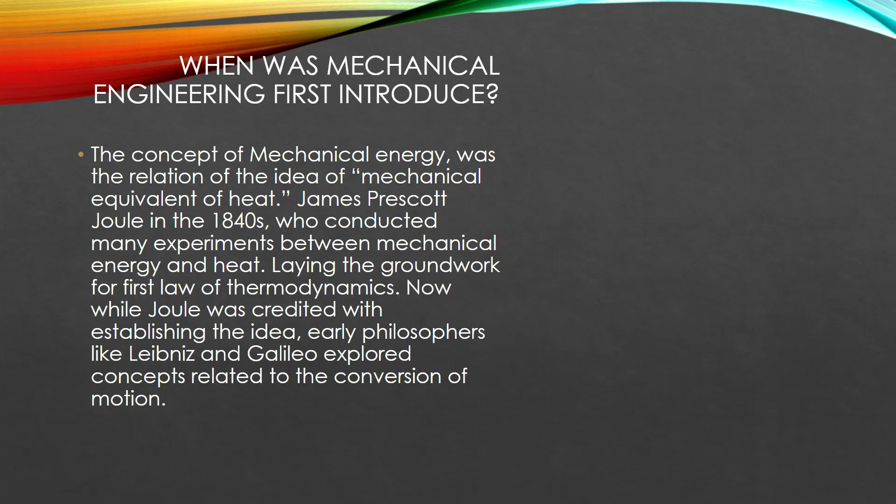So when was it first introduced? It's a little bit complicated, so let's get into it. The concept of mechanical energy was related to the idea of mechanical equivalent of heat. James Prescott Joule, in the 1840s, conducted many experiments between mechanical energy and heat, laying the groundwork for the first law of thermodynamics.

While Joule was credited with establishing the idea, early philosophers like Leibniz and Galileo explored concepts related to the conversion of energy and motion. I'm sorry if I butchered their names. This picture right here is basically James Prescott Joule.

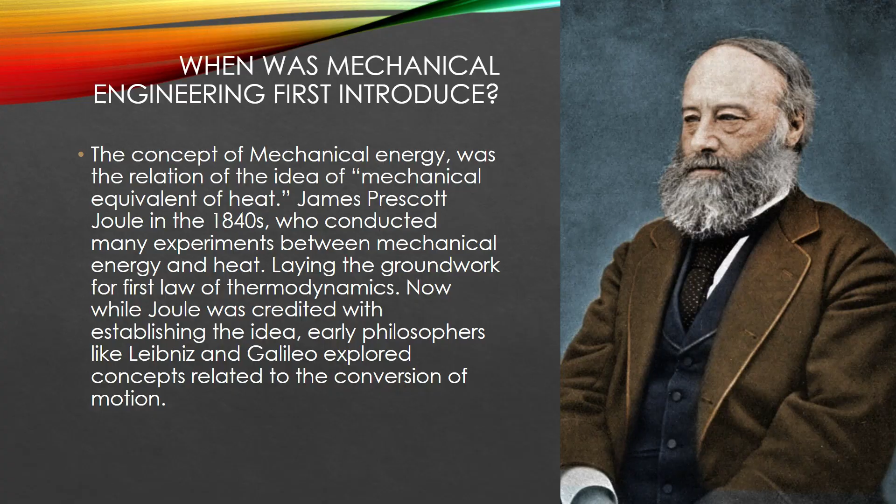Thermodynamics is the science of the relationship between heat, work, temperature, and energy. It also deals with the transfer of energy from one place to another and from one form to another. The key concept is that heat is a form of energy corresponding to a definite amount of mechanical work.

There are technically 4 laws if you include the zeroth law. But let's talk about the 3 main laws that you mainly need to learn and know.

The first law states energy cannot be created or destroyed, or in thermodynamics terms, heat cannot be created or destroyed. This has been one of the biggest sayings in the universe forever. The second law states that for a spontaneous process, the entropy of the universe increases. The third law states that a perfect crystal at 0 Kelvin has 0 entropy.

As you can see in the picture here, these are more examples of how the first, second, and third laws work, and the zeroth law as well. The entropy of a system approaches a constant as the temperature approaches absolute zero.

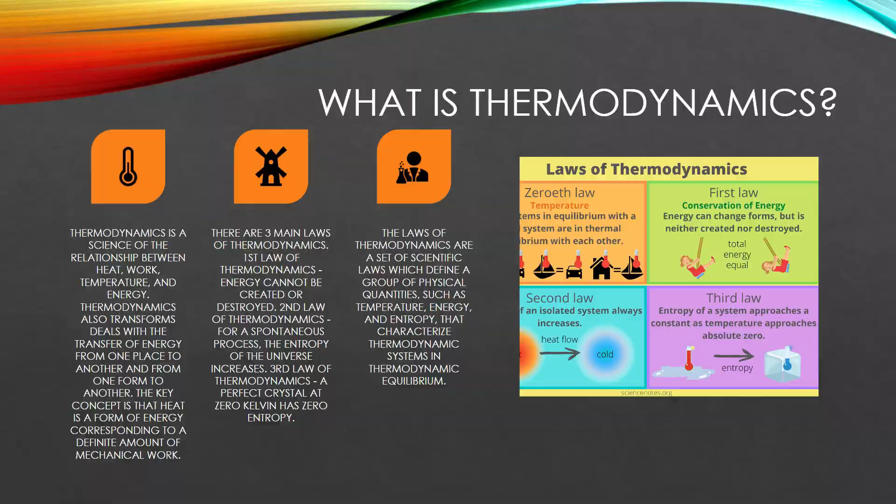In 1698, Savery had obtained a broad patent for his pump. Newcomen could not patent his engine, so he entered a partnership with Savery. This became the first recorded Newcomen engine, erected near Dudley Castle, Staffordshire, in 1712.

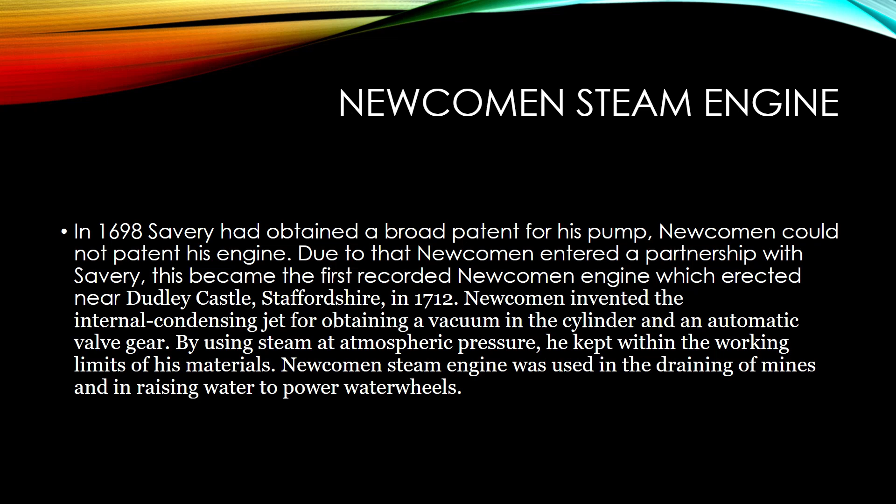Newcomen invented the internal condensing jet for obtaining a vacuum cylinder and an automatic valve gear. Using steam at atmospheric pressure, he kept it within the working limits of his materials. Newcomen's steam engine was used in draining mines and in raising water to power water wheels.

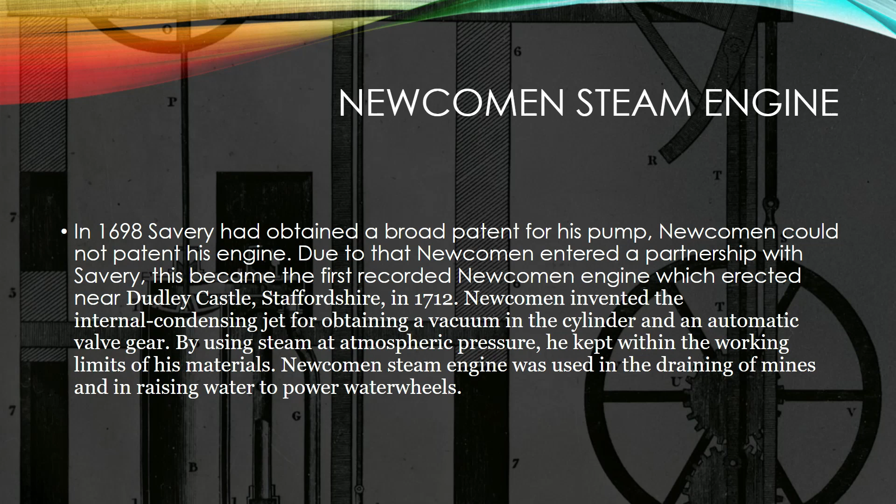This is the first design of the Newcomen steam engine. You see here, you're pulling up water, as you would usually have a bucket right there pulling up water, and so on. Now, the sewing machine.

This picture shows Howe invented the first practical sewing machine, but the first recorded design of the sewing machine was created by Thomas Saint in London in 1790. A sewing machine is a device that stitches fabric and other materials together with a thread.

A sewing machine uses a needle and thread to stitch fabric together in an up and down motion. Early sewing machines were powered manually by spinning a wheel, but modern sewing machines are powered by electricity. Back then, you had to actually generate electricity, but now it just runs by itself because of the advancements we've had in technology.

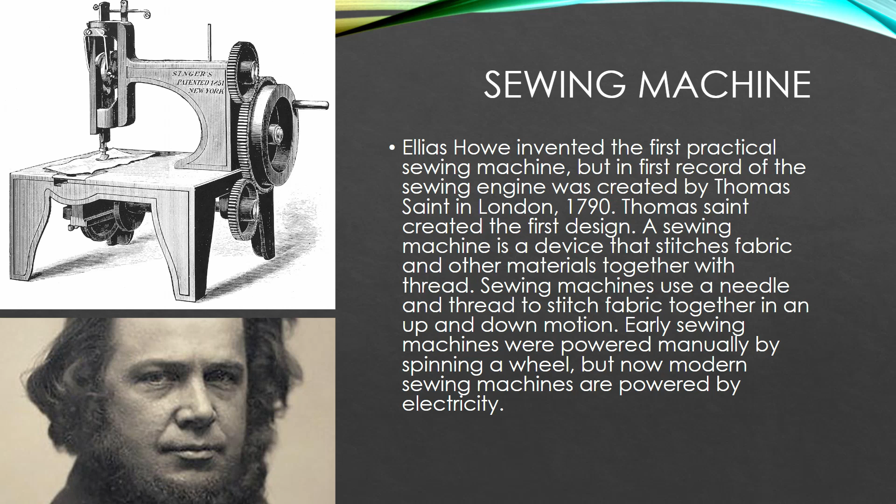Now let's move over to mechanical refrigeration, also known as air conditioning or refrigeration. It's a process that uses a heat exchange system to remove heat from a specific location. It's based on the first law of thermodynamics, which states that heat cannot be created or destroyed, only moved from one place to another.

Dr. John Gorrie expanded on this idea, but Oliver Evans, an American inventor, designed a blueprint for mechanical refrigeration. In 1834, the first practical mechanical refrigeration was built by Jacob Perkins. But Dr. John Gorrie took that blueprint and invention to a whole new level.

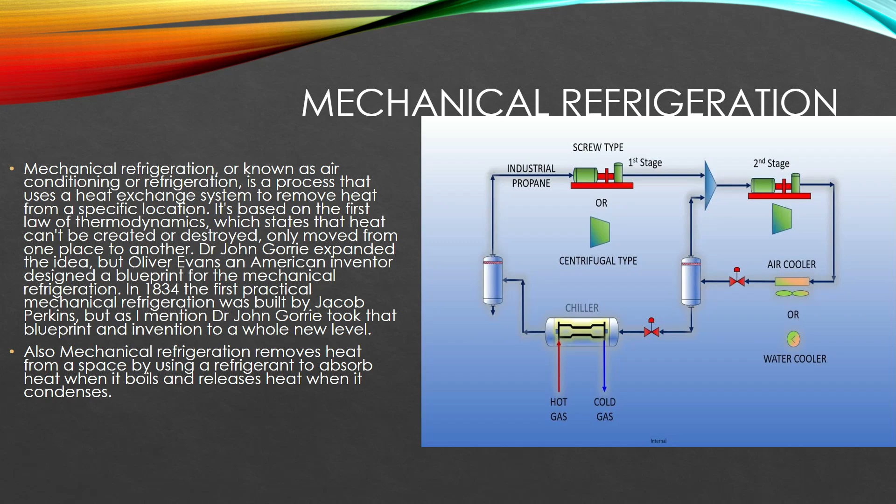Mechanical refrigeration removes heat from a space by using refrigerant to absorb heat when it boils and release heat when it condenses. This picture right here is the most simple version of how it works.

You don't really start somewhere specific, but let's say you start at the evaporator, then go to the compressor, over to the condenser, and on to the receiver to receive the high pressure liquid.

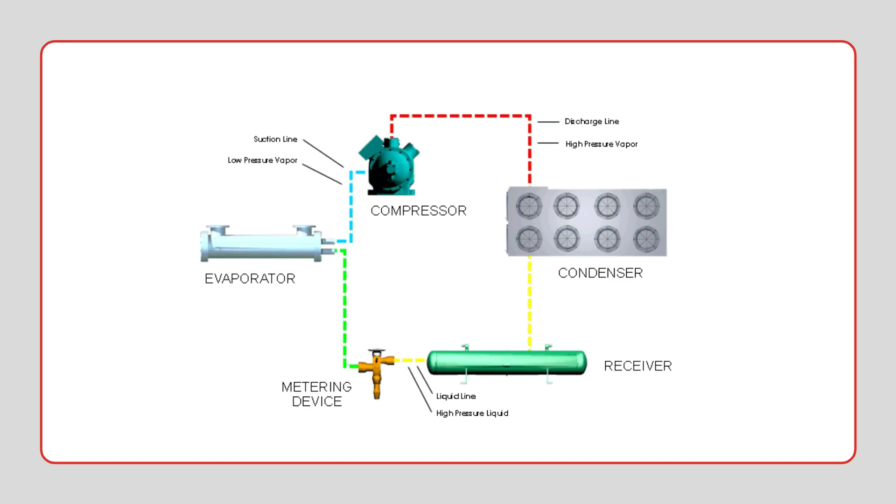The first fuel cell, also known as a gas battery. The fuel cell works like a battery, but it does not run down or need recharging, meaning it produces electricity and heat as long as fuel is supplied.

The fuel cell consists of a negative electrode and a positive electrode, and they are surrounded by an electrolyte.

Invented by Sir William Grove in 1838, it was introduced to the public by 1839. The concept involved reversing electrolysis, the process to generate electricity from hydrogen and oxygen.

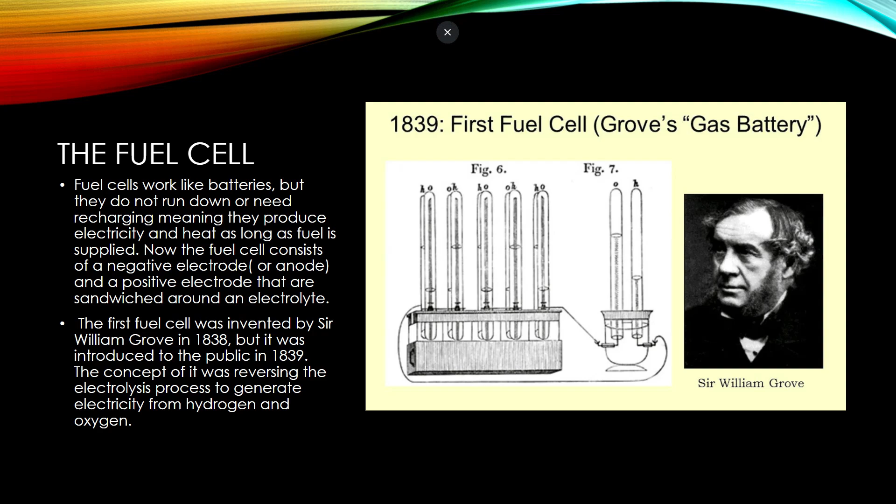Solar power could be one of the biggest things in the engineering world, and specifically in mechanical engineering.

Solar power, also known as solar energy, is the process of converting the sun's energy into electricity or heat. It's a renewable energy source that can be used for many purposes, including heat, electricity, and even light.

Solar power has been around since BC times, but there have been many contributions to explaining the idea of solar power. During the 7th century BC, people used solar power by reflecting the sun's rays onto shiny objects to start fires.

From the 1800s to the late 1950s and early 1960s, there have been many ideas to expand upon this use of solar energy.

In 1839, French physicist Edmond Becquerel discovered the photovoltaic effect, which is when certain materials produce an electric current when exposed to sunlight.

In 1873, English electrical engineer Willoughby Smith discovered that selenium had a photoconductive potential. In 1876, Professor William Grylls Adams and his student demonstrated that selenium could be used to create electricity from sunlight.

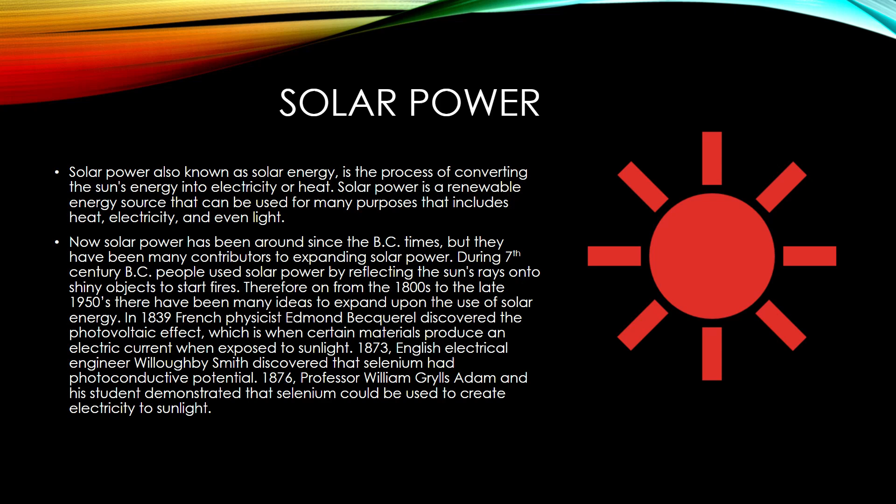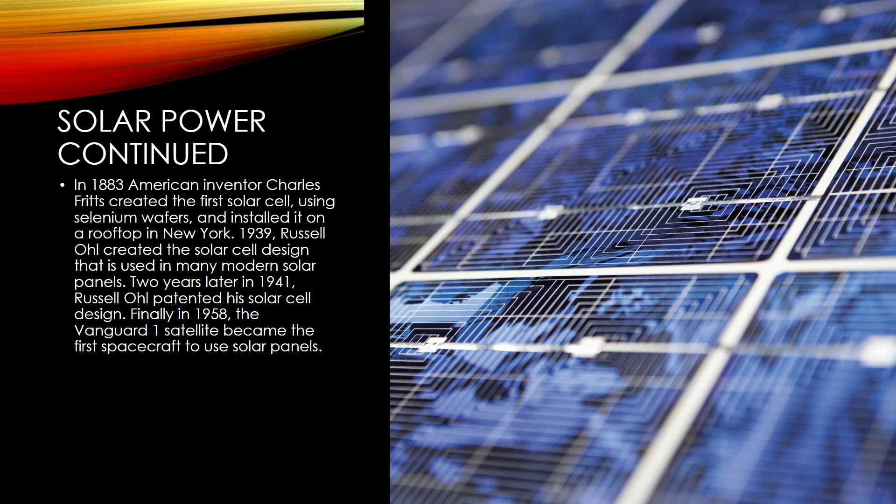In 1883, American inventor Charles Fritts created the first solar cell using selenium wafers, and installed it on a rooftop in New York. In 1939, Russell Ohl created the solar cell design used in many solar panels, and two years later, in 1941, he patented his first solar design. Finally, in 1958, the Vanguard 1 satellite became the first spacecraft to use solar panels.

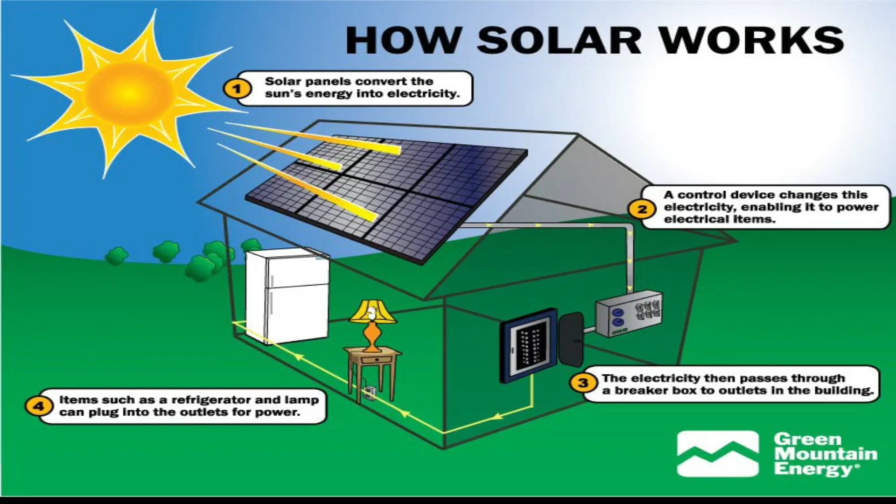In simpler terms, let's move on to machine guns. By harnessing the energy released in the firing cartridge, Maxim produced a weapon capable of discharging multiple bullets by simply activating the trigger. Maxim's machine gun was water-cooled and belt-fed, with a theoretical rate of fire up to 600 rounds per minute.

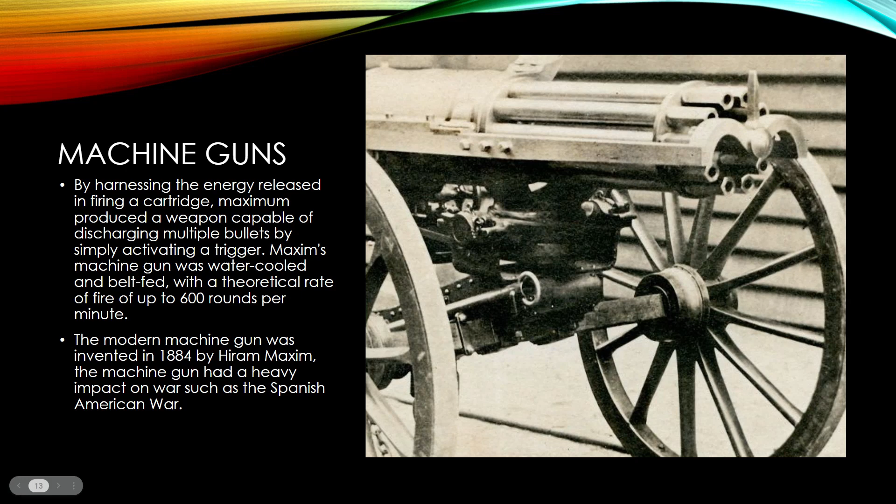The modern machine gun was invented in 1884 by Hiram Maxim. The machine gun had a heavy impact on wars such as the Spanish-American War.

The automobile could be described as the biggest advancement in the mechanical engineering world. On January 29, 1886, German inventor Carl Benz patented the first three-wheel motor wagon, a vehicle powered by a gas engine. This could be regarded as the birth of the automobile, but let's dig a little more into it.

Cars work by using an engine to overcome forces like gravity, air resistance, and friction in order to move. There are many components that make the car work, including the engine, transmission, chassis, cooling system, exhaust system, and battery.

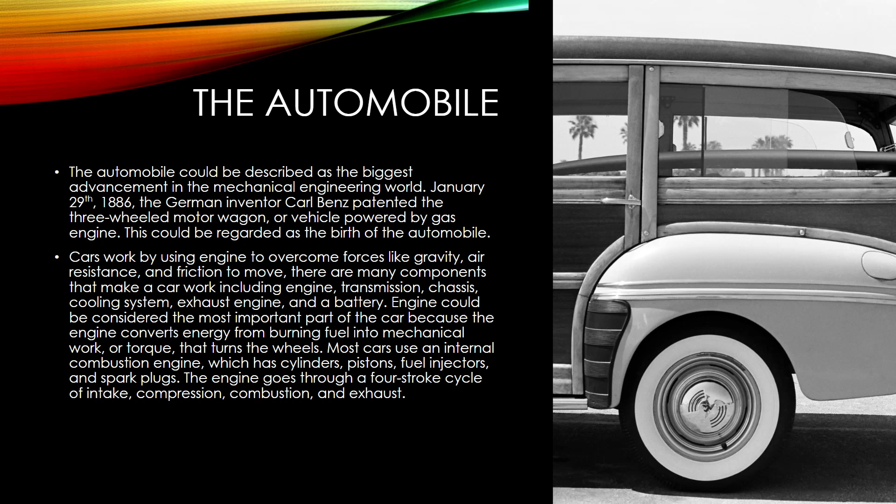Most cars use an internal combustion engine, which has cylinders, pistons, fuel injectors, and spark plugs. The engine goes through a 4-stroke cycle: intake, compression, combustion, and exhaust.

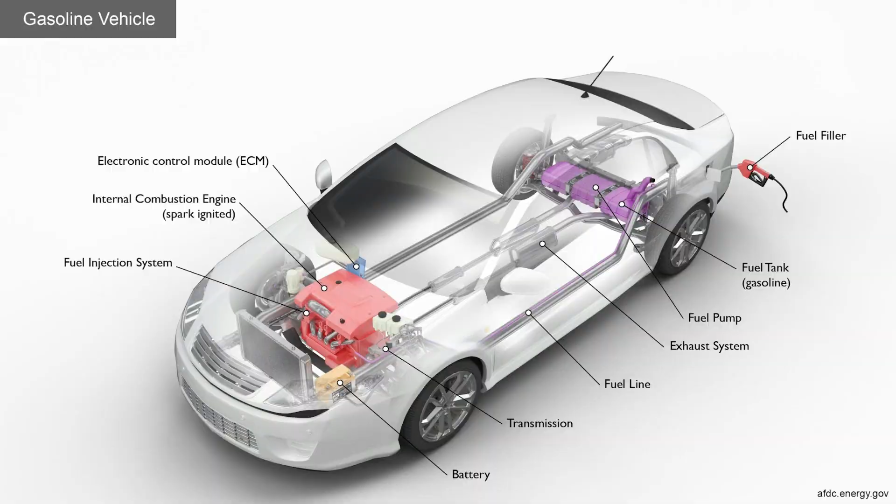This is the basic modern day automobile right here. As you can see, the fuel tank, the fuel pump, and the engine. The fuel line connects more to the engine. You see the batteries right here, the engine, and the electronic control module. So that's on the Industrial Revolution.

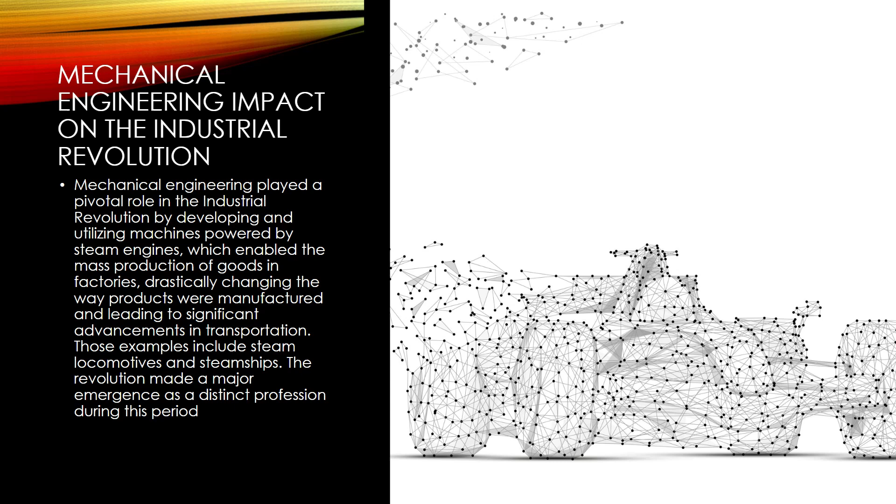Mechanical engineering played a pivotal role in the Industrial Revolution by developing and utilizing machines powered by steam engines, which enabled the mass production of goods in factories, drastically changing the way products were manufactured and leading to significant advancements in transportation. Examples included steam locomotives and steamships. The revolution made mechanical engineering emerge as a distinct profession during this period.

Now, the impact this had on wars. In both World War I and World War II, mechanical engineers and engineers in general were very important to the war effort in developing necessary machinery, aircraft, weapons, and more to help win the war. Mechanical engineers contributed to the design and improvement of fighter airplanes, tanks, vehicles, machines, and more. During that time, the first computers were developed.

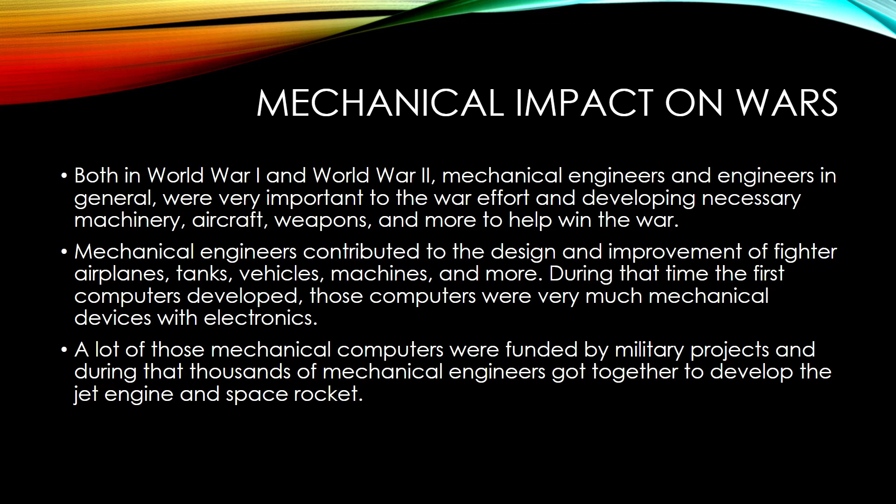Now, the impact this had on modern society. Mechanical engineering has made a significant impact on modern society. Those ways include creating products and technologies, improving sustainability, improving human health, making life more convenient, integrating emerging technologies, and even optimizing production processes. Mechanical engineering is a versatile field that draws from physics and material science, which you might not have known.

If you want to be a mechanical engineer, you need to understand physics at a very high level. It's going to be very important for you in the future. Then you have some well-known engineers. So let's get into it.

Nikola Tesla is well known for the design of the modern alternating current electricity supply system. He also contributed to radio technologies and is often known as the father of radio. George Stephenson was a British inventor who created the first inner-city railway system. He's also known as the father of the railways, and this, of course, reshaped transportation and the industry.

Aurel Stodola began the study of thermodynamics and was even a professor of Albert Einstein himself. He most notably invented the first heat pump and contributed to the beginning of the steam and gas turbines.

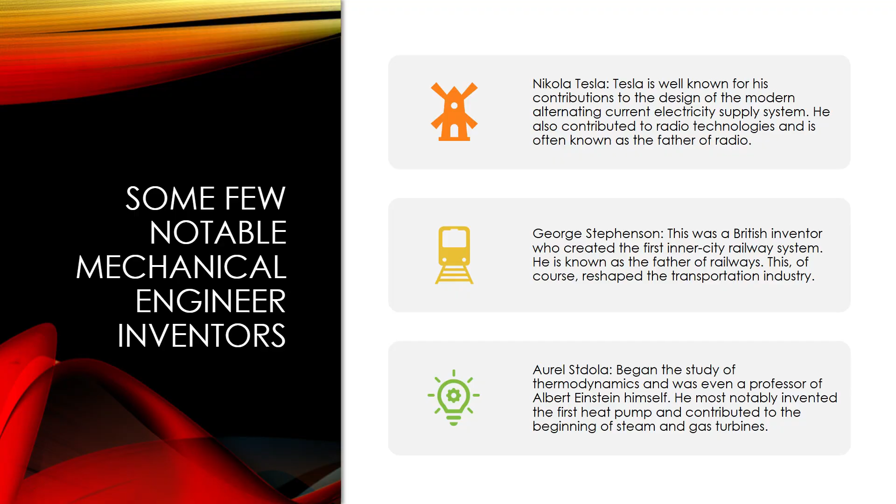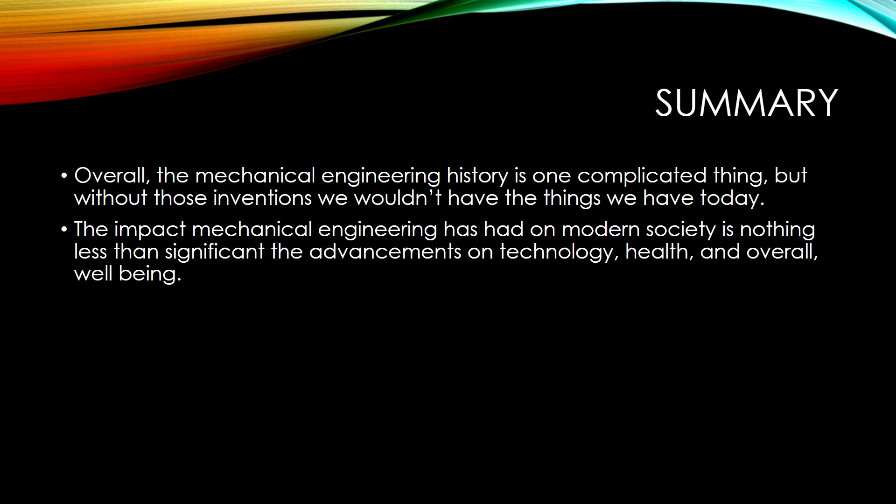Now, the overall summary is that mechanical engineering history is one complicated thing, but without these inventions, we wouldn't have the things we have today. The impact mechanical engineering has had on our society is nothing less than significant—advancements in technology, health, and overall well-being.